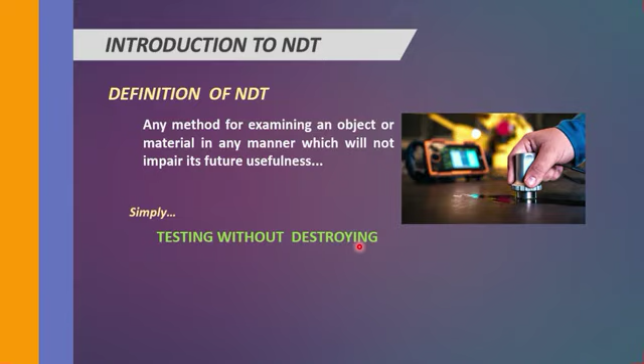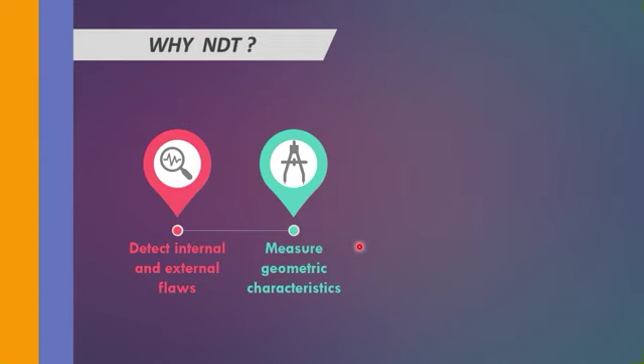Next, why NDT? Non-destructive testing is used to detect internal and external flaws, or internal and external discontinuities, and used to measure the geometric characteristics. It means non-destructive testing is also used to find out the length or thickness or something else based on geometry. It is also used to determine material structures or composition, and to measure some of the material's properties, right?

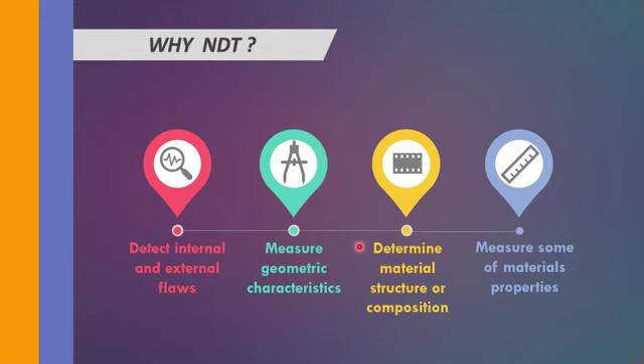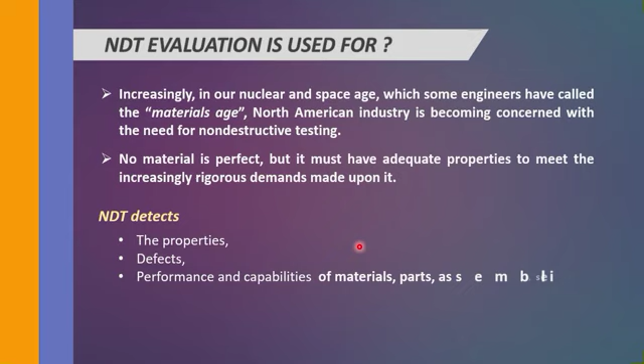So next, NDT evaluation is used for. See, in any production, we're not sure that every material manufactured is perfect. There may be some defective pieces during the process of manufacturing, and these defective pieces cause loss of safety during working. So it is used to find out the defective materials within the company, increasing the safety by not allowing the defective pieces outside for working, right?

So you can have a look at here. NDT evaluation is used increasingly in nuclear and space, which some engineers have called the materials age. North American industries are becoming concerned with the need of non-destructive testing. No material is perfect, but it must have adequate properties to meet the increasingly rigorous demands made upon it.

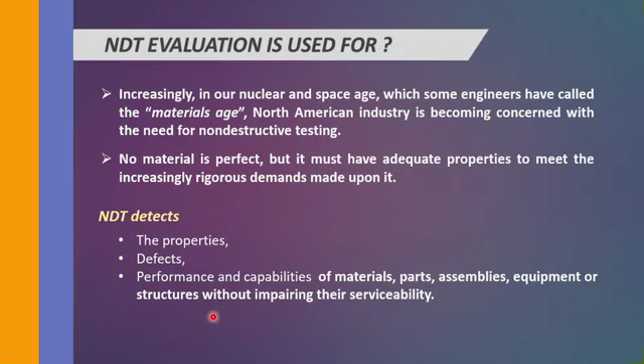So NDT is used to find out the properties of the material, and it is also used to find out the defects present within the material, and to find out the performance and capability of the materials, parts, assemblies, equipment or structures without impairing their serviceability or without destroying the materials, right?

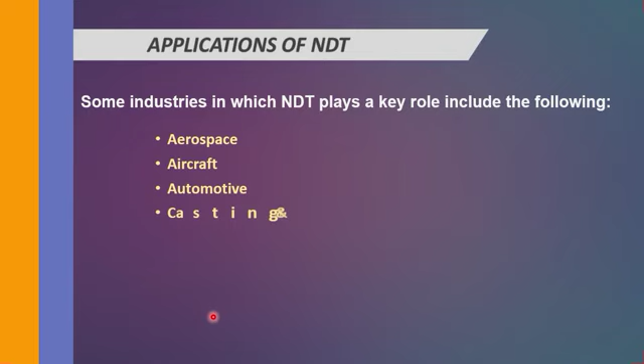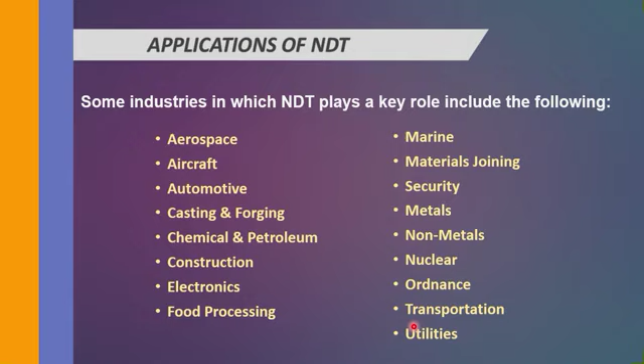To the next topic. Here are the applications of NDT. NDT is used in almost all industries. Here are some industries where NDT is used most: aerospace, aircraft, automotive, casting and forging, chemical and petroleum, construction, electronics, food processing, marine, materials joining, security, metals, non-metals, nuclear, ordnance, transportation and utilities. So maximum of all the industries use non-destructive testing, right?

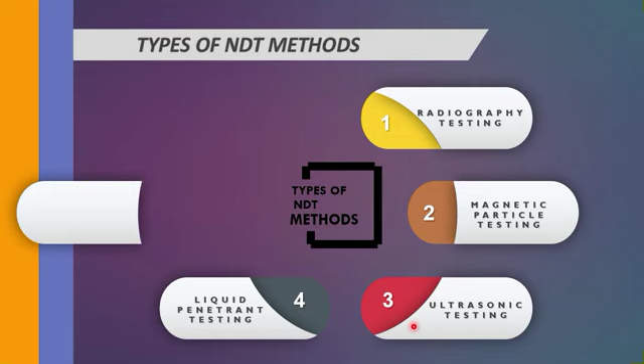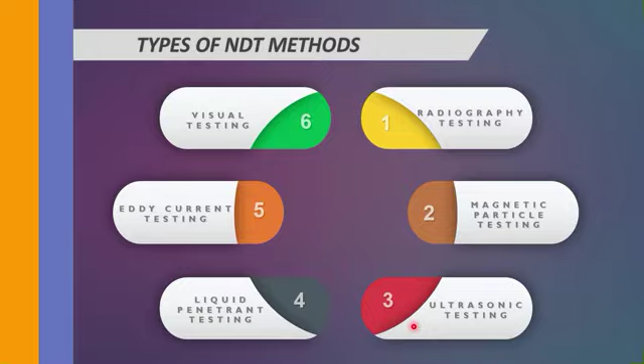Next, types of NDT methods. There are many NDT methods. In this video we discuss the mostly used NDT methods. They are radiography testing, magnetic particle testing, ultrasonic testing, liquid penetrant testing, eddy current testing, and visual testing. Now let us discuss each test one by one.

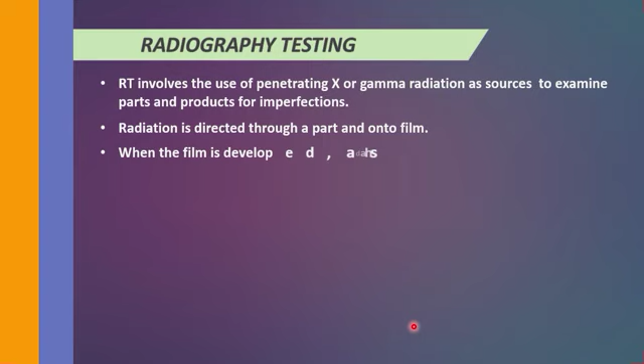Okay, right. First, radiography testing. See, any test is named based on the inputs we use. Like for example, blood test.

It is a type of test to find out the abnormalities of the person. Here in blood test we generally use blood as a medium to find out the abnormalities of the person, hence it is named as a blood test. Similarly, any test is named based on the medium used to perform the test.

If you observe the radiography test, you can find three words: radio, graphy and testing. Testing is nothing but examining or evaluating something, graphy means image, and radio refers to the radioactive rays. So by observing the name, I think you get a small idea that it is a type of test.

Radiography test is a type of test which is used to detect the discontinuities within the material by using radioactive rays like X-rays and gamma rays, by passing those rays through the material and generating an image of the material, and evaluating the image to judge whether discontinuities are present within the material or not.

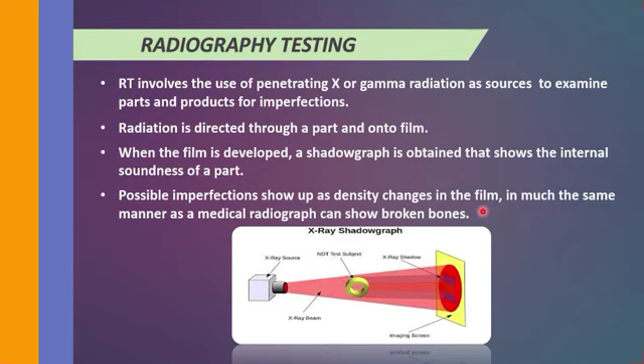After developing, we observe the film and judge whether there is any discontinuity present in the material or not. When the film is developed, a shadowgraph is obtained that shows the internal soundness of the part. Possible imperfections show up as density changes in the film, in much the same manner as a medical radiograph can show broken bones.

I think it will be clear with a basic working animation of RT. Here I have taken a material which has an imperfection in the center, and I have placed the material between the source, from where the X-rays and gamma rays get released, and the film, which acts as a recorder.

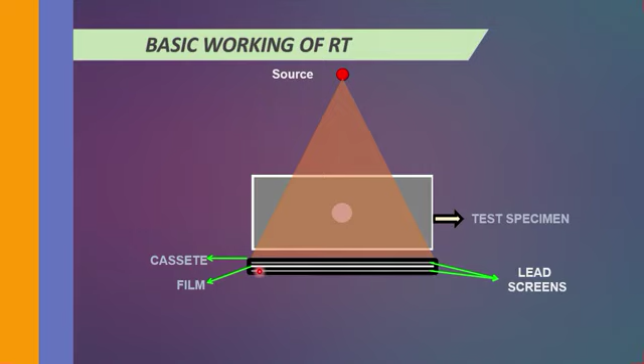Now I allow the X-rays and gamma rays to pass through the material and reach the film. This process is known as film exposing. After the film has been exposed, we forward the film for developing. After the developing process, the film gets developed like this.

See, you can observe the variation right here in the shape of the same discontinuity which is present within the material. The reason...

The reason to get variation in the film is generally the film is similar, like in the initial stage, before exposing, it is gray or white in color, and it turns dark depending upon the amount of energy it reaches.

If more energy or intensity reaches a particular region of the film, that region becomes darker, and the region where less energy is reached will appear lighter.

Coming to the material, suppose there is some imperfection like a porosity, a pore, a shrinkage, or some cavity within the material. Cavity means there is no material in that region.

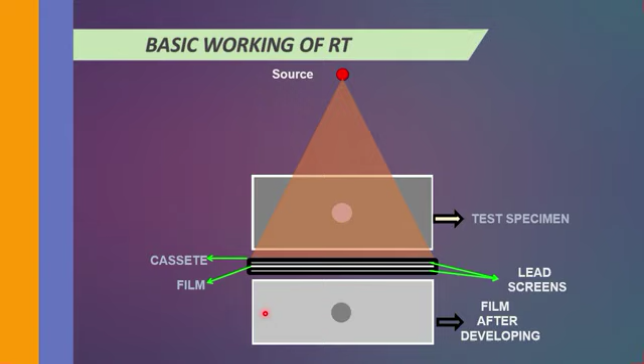I think you're clear with the point I'm discussing. So, next moving to the next thing: magnetic particle testing.

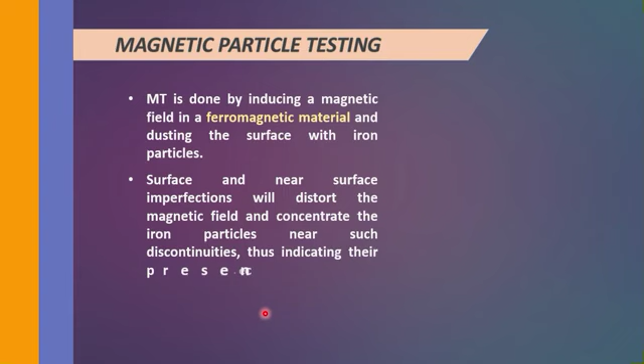Here you can observe three words: magnetic, particle, and testing. Testing is commonly known as examination. So by the name, you can get an idea that it's a type of test which uses magnets and magnetic particles as inputs to find out the discontinuities present within the material.

In RT, compared to this, RT can be used to find discontinuities in all materials, because we generally use X-rays and gamma rays as inputs, and they have the capability to pass throughout the material.

But coming to magnetic particle test, here we can test only materials which react to magnets. Hence we can check only ferromagnetic materials. We're not able to perform magnetic particle test on other than ferromagnetic materials, because they won't show any reaction to magnets.

Magnetic particle test is done by inducing a magnetic field in a ferromagnetic material and dusting the surface with iron particles. Let me explain what's happening in the magnetic particle test.

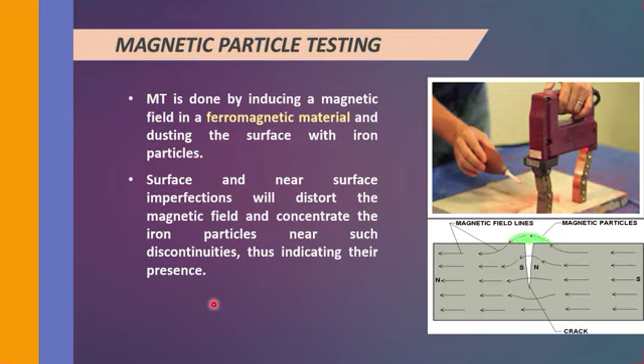But the particles within the region of leakage will not blow off, they will stay on the material, indicating that there is some discontinuity in the region. Surface and near surface imperfections will distort the magnetic field and concentrate the iron particles near such discontinuities, indicating their presence. So while performing the magnetic particle test, if you find magnetic particles getting accumulated in any region, it indicates that there is some discontinuity in that region.

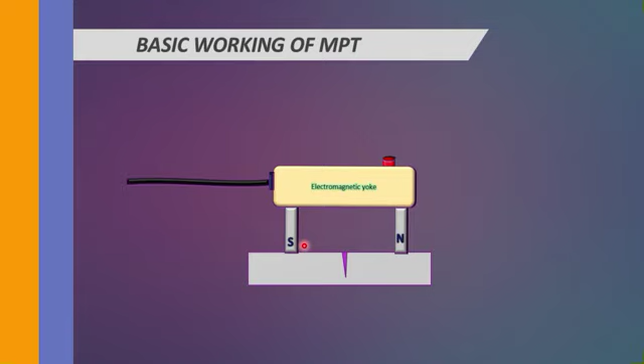Now you can have a general animation about the basic working of magnetic particle test. Here I have taken a material which has a discontinuity. Initially I use the magnet and apply the magnetic lines of forces, passing them within the material.

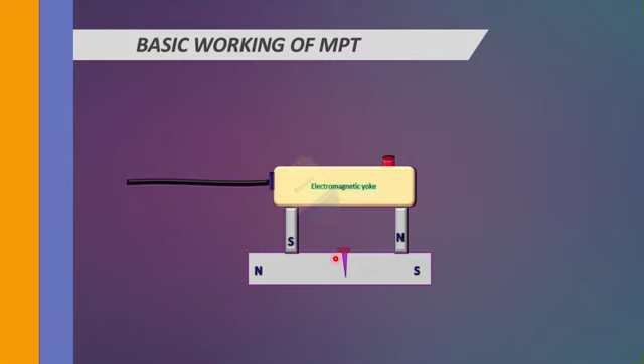After that, apply magnetic particles throughout the complete region, and then use a blower to blow off. After using the blower, the particles present on the region of discontinuity will stay, while the particles beside that region get blown off. So the particles stay due to magnetic flux leakage, and the accumulated region indicates that there is a discontinuity in that region. I think you're clear with this.

So let's move to the next test, ultrasonic testing.

In ultrasonic testing you can observe three words: ultra, sonic, and testing. Testing means examine, ultra refers to high, and sonic refers to sound. It is a type of test, one of the NDT methods used to find discontinuities within the material using high frequency sounds.

In ultrasonic testing, we pass high frequency sounds into the material we want to test, and we judge the material's quality by observing some reflections within the material. Generally, UT uses transmission of high frequency sound waves into a material to detect imperfections within the material or changes in the material properties.

To understand ultrasonic testing clearly, let me give a general example. Suppose I stood in front of a mountain and shouted, with a name or something else. This sound travels within the air up to the point of the medium change.

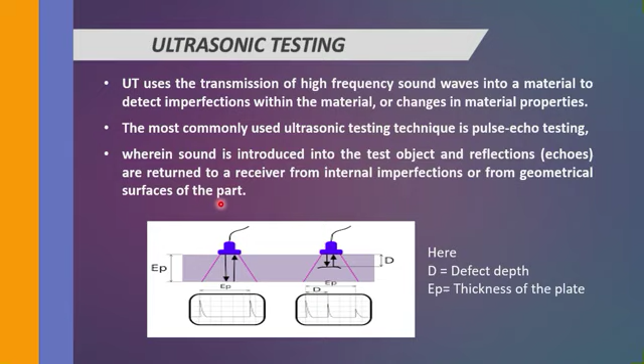This can be clarified by the following animation, showing the basic working of UT. Here I have taken a material, and it is generally called a probe, which is a means of generating sound. I have set my setup according to this material, and we allow the sound to pass through it. The sound travels throughout the material and gets reflected from this point.

The reason is, see, this point is said to be an interface. Interface is nothing but the dividing line between the two mediums. Here it is a solid medium, and the outside region is air. So it simply means there's some medium change, solid and air.

So where the medium gets changed, the sound gets reflected, or some of the sound also gets transmitted into the second medium. But where there is a presence of air, only reflection occurs. It can be made clear with the related topics. But you have to observe that the sound travels up to the point where there is no medium change, and the sound gets reflected back from the point where there is a medium change, right?

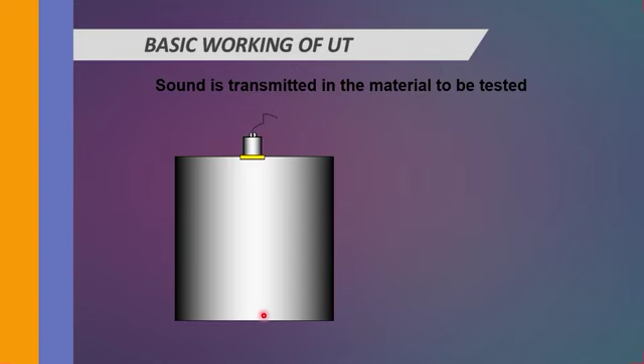And the reflections can be identified on a screen, on what is called an ultrasonic flaw detector, in the form of an echo. See here, the sound gets started, and you can clearly observe it right here. One more time, you can observe clearly. The sound started, and when the sound is received by the receiver or by the probe, it indicates with an echo. You can observe an echo right here.

It is called the initial echo, and this is called the back wall echo. Initial echo refers to the initial point of the material, and back wall echo refers to the last surface of the material. And by observing what is in between these two echoes, we can get information about whether discontinuities are present within the material or not, right?

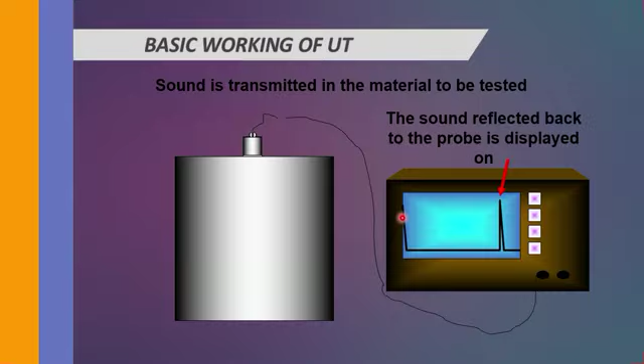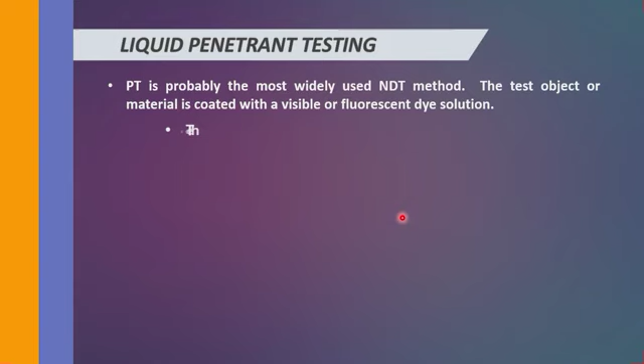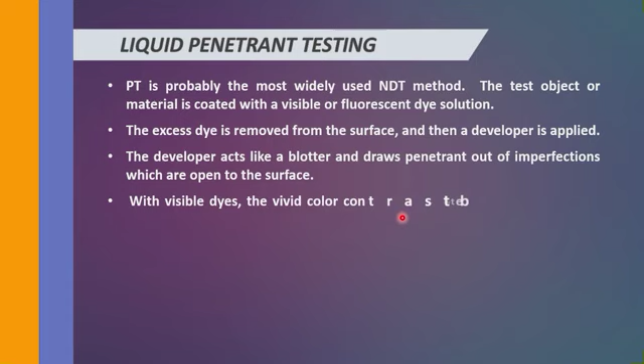Okay, next, discussing the liquid penetrant test. Liquid penetrant test is one of the NDT methods which uses liquid penetrants. In liquid penetrants we generally use liquids which have the capability to penetrate into open discontinuities. So it is mostly used to find out surface discontinuities. In liquid penetrant test, the test object is coated with a visible or fluorescent dye solution.

Let me explain what generally happens in the liquid penetrant test. Initially the material which we want to test has to be cleaned properly, and then it is coated with a liquid penetrant which is mostly red in color. After that we allow some time so that the penetrant applied on the surface enters into the discontinuity, and then we clean the surface region so that the penetrant is present only in the region of discontinuity.

And then we use one more liquid which is called a developer, and the action of the developer is used to draw out the settled penetrant. Once you have applied this developer, the settled penetrant bleeds out. So by observing the bleed out of penetrant, we can judge that there is a discontinuity in the region. So see what is given right here.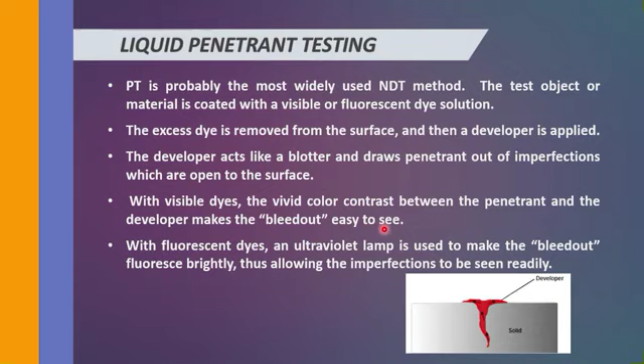Initially the test object is coated with a visible or fluorescent dye solution. Then the excess dye is removed from the surface, and then a developer is applied. The developer acts as a blotter and draws the penetrant out of imperfections which are open to the surface. With visible dyes, the vivid color contrast between the penetrant and the developer makes the bleed out easy to see. It can be made clear with the following picture.

Here it is my material, and there is a discontinuity present in the material. Initially I have cleaned the complete region where I am going to apply the penetrant. Then I have applied the penetrant and allowed some time so that the penetrant gets settled into the discontinuity. Later I have removed the penetrant from the surface so that the penetrant is settled only in the discontinuity region.

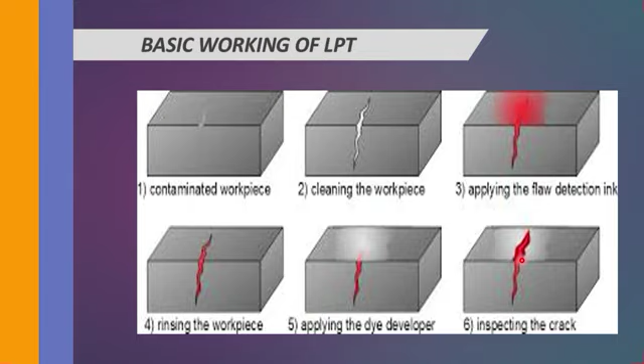So later I have applied the developer and I have given some time to perform the developing action, and this developer brings out the penetrant from the settled discontinuity and makes us view it clearly, right? So it is the process of liquid penetrant test. And you can also look at the following working by an animation.

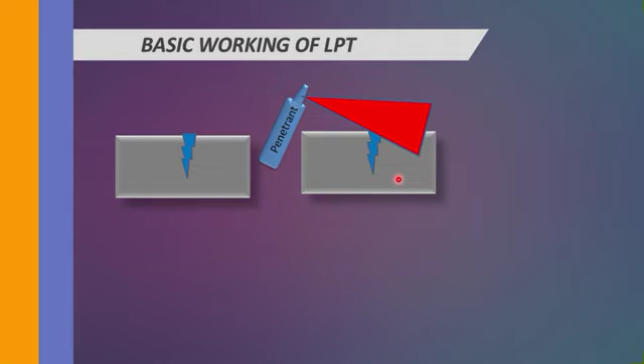So here there is a material which has a discontinuity right here. So initially I have cleaned the material and then I have applied the penetrant, which is generally red in color, throughout the region. Then I have given some time so that the penetrant gets entered into the discontinuity. Later I have removed the penetrant from the surface, which is called the excess penetrant, so that only the discontinuity has penetrant within it.

Later I have applied developer throughout the region, generally white in color. The action of the developer is to bleed out the settled penetrant. Generally the developer is white in color, and if the penetrant bleeds out of the settled discontinuity, the region where the penetrant bleeds out will appear red in color.

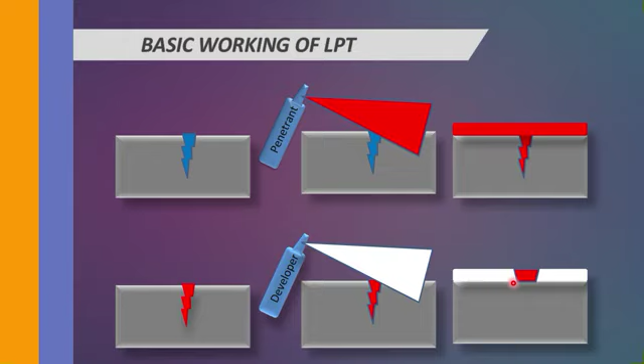So it means if you observe any red color indication after the application of the developer, there is some discontinuity present in that region, right? So I think all above four methods are clear. Now coming to the next point, eddy current test.

Eddy current test is one of the NDT methods which uses eddy currents. Eddy currents are nothing but secondary currents, and it is a type of test which is similar to the magnetic particle test. Generally in magnetic particle test we pass magnetic fields into the material. Here we pass eddy currents into the material and observe the interruptions in the flow of electrical currents, right? So you can have a look here.

In eddy current test, electrical currents are generated in a conductive material by an induced magnetic field, and interruptions in the flow of the electrical currents, which are caused by imperfections or changes in the material's conductive properties, will cause changes in the induced magnetic field.

See, here we use magnetic fields and produce eddy currents within the material, and the flow of eddy currents can be changed due to an imperfection or due to a change in material properties like conductive properties. So these changes can be identified by the change in the induced magnetic field, right? So this change, when detected, indicates the presence of a change in the test object.

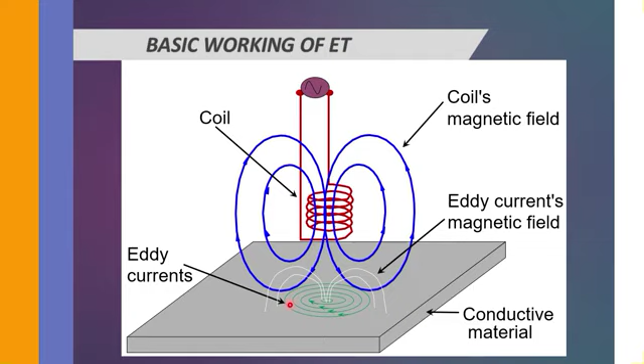See, it is a coil. It is the setup for eddy current test. There is a coil which releases the magnetic fields, and we place this setup on a conducting material, which causes eddy currents to flow within the material, and these also cause the flow of some magnetic fields, and these get varied with the presence of discontinuities or with a change of material properties for conduction, and it can be identified by the equipment, right?

Next, visual testing. Visual testing is the oldest and most common NDT method, having a number of industrial and commercial applications. Generally, visual testing is a type of test which is used to find discontinuities by using the naked eye. And discussing visual testing, every test is a combination with visual testing. How? Look at RT.

In RT we judge the discontinuities present in the material by observing the film. So here we observe the variation in the film by our naked eye. So it means RT is a combination with visual testing, because we are observing with the naked eye, hence it becomes visual testing. So RT is a combination with a visual test.

Coming to magnetic particle test, we observe the accumulated magnetic particles, so hence it is a combination with visual testing. Similarly, in ultrasonic testing we observe the echoes on a screen, so ultrasonic testing is also a combination with visual testing. Similarly, liquid penetrant test and eddy current tests.

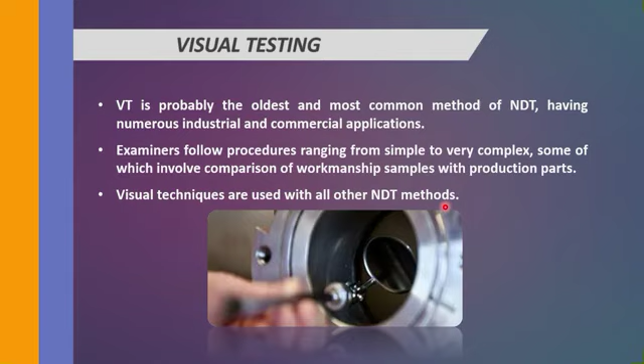So examiners follow procedures ranging from simple to very complex, some of which involve comparison of workmanship samples with production parts. Visual techniques are used with all other NDT methods.

Right. Next, special NDT methods. Up to now we have discussed the 6 NDT methods which are used most commonly. Here are some more NDT methods: microwave testing, ultrasonic imaging, lasers, holography, liquid crystals, and infrared thermal testing techniques, in addition to many other specialized methods. In fact, there are almost 80 different evaluation methods identified as being non-destructive. Right.